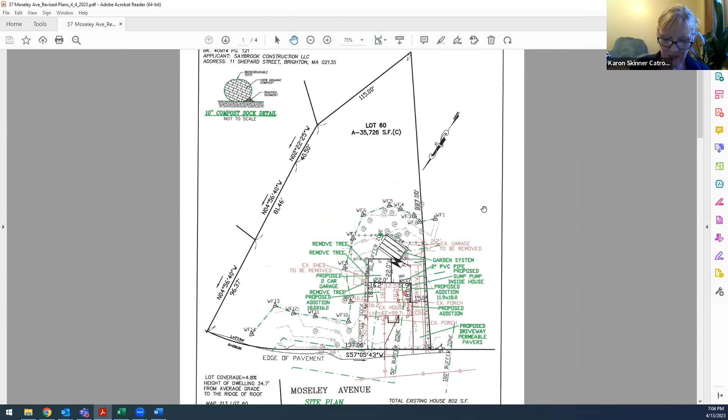What we're proposing to do is add a 22 by 22 garage addition to the rear of the existing house, an 18 by 16.2 addition on the left side of the existing house, an 11.9 by 18 addition on the left side of the driveway—some of which is currently stairs and a porch—and a small addition to the front entranceway.

The existing house created 115 square feet of impervious surface within the 25-foot buffer. The additions will create an additional 225 square feet of impervious within the 25-foot buffer. We originally had an infiltration system, a great deal of which was in the 25-foot buffer. We've changed that to a rain garden, which you can see at the back of the house, and kept it outside the 25-foot buffer. As mitigation, we are removing the shed on the left-hand side and the existing garage in the rear.

So we've added a lot of plantings to the plan. We added 6 trees for the 3 that we're taking down, and we've added 12 shrubs and 15 pollinator plants, mostly along the left side of the 25-foot buffer and in the area of the shed, which will be removed.

Also, there's a sump pump shown, which will be collected in the rain garden. So I don't know if that makes it a little bit clearer for everyone.

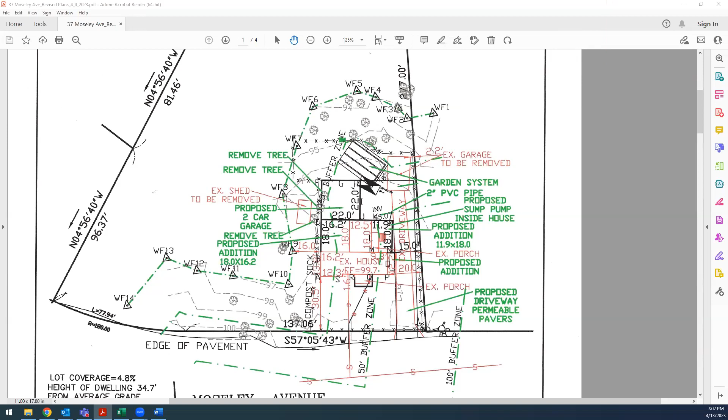I don't believe so. Daniel, is there an infiltration system? That's erroneous - there won't be any storm tech systems on the site. It'll just be the garden system for all the roof discharge. So this note 3 is incorrect. That's right, Janet.

And then this garden system has pipes to drain it through - is that what he's showing here? So there's a pipe shown coming out from under the driveway, going to the house. It's from the front rear of the system, comes out diagonally and then goes into the house.

Then under the notes, it has 115 square feet of existing house footprint inside the 25-foot buffer, 63 square feet of the existing garage inside the 25-foot buffer, 340 square feet of proposed house inside the 25-foot buffer, and 484 square feet of proposed garage, but it looks like the garage is also inside the 25-foot buffer.

Is that just a portion? Is that part of the 340 square feet? Yes, just a portion of the garage is part of that calculation. Okay, that helped clear some things up.

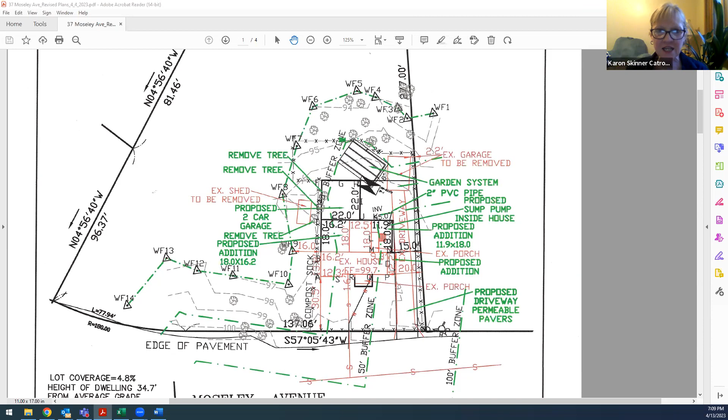Okay, so I'm going to go around and ask commission - Allison, any comments at this stage? Is there anywhere the new trees are shown? I can't see them on this plan - unless I'm crazy. No, you're not crazy, there's another plan, a landscape plan. But it's not up now though, right? Yeah, it's coming next.

Keep going, one more, there you go. So I did go out to the site and look and find locations suitable for a tree, so they're not just randomly put on the plan. And then we tried to focus the plantings on pollinator plants.

Proposed addition, remove tree, remove tree, remove tree, garden system - where's the proposed trees? Expand a bit, move down a little bit. It's on the top of the sheet, other direction. There you go. Oh I see - B, N, B, M, N, B, N, B, N, B. Okay, I get it.

So actually, the proposed trees are in the front of the lot - if you scan up a little bit, Clay. Yeah, they're on the left of the house in the front. That's the area they had the most room for trees. So RM is, I'm assuming, red maple? Red maple, yeah.

Okay, and you have sugar maple, red maples, and a box elder. Elder - that's on the list, huh? Yeah, wouldn't have realized box elder was on the list.

Okay, and then there's some perennials. We have some garden plants, winterberry, milkweed. So where are the garden plants shown? They don't have those symbols.

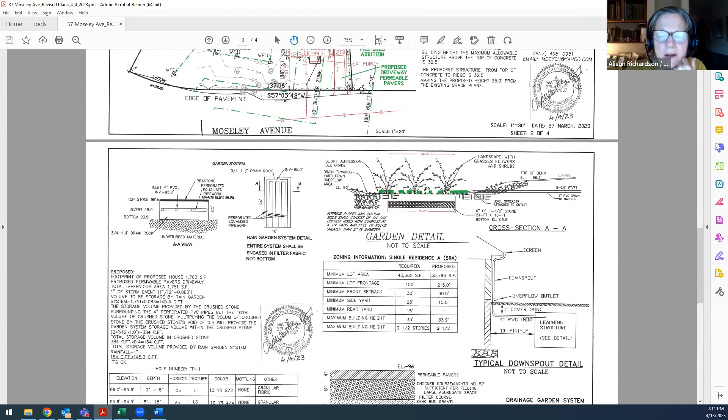So those are shown with initials there - the garden plants are proposed in the rain garden. Okay, okay, in the garden. Okay.

I guess the only oddity to me is the box elder. I'm not sure, is that on our list? Where did I put it? Debbie, I believe I used your list. It must be, but I've never - I'll get back to you on that.

Would you prefer something else? No, it's okay, if it's on the list you can use it. It's not a great plant, but that's okay.

Do you want us to change it, put a silver maple in? We could probably put a silver maple in there - it's a much bigger tree, so we'll change that. The other thing is it's Acer rubrum, not rubrun.

And it's saccharum - there's some spelling mistakes, just want you to check your spelling. Probably my handwriting when it was transferred. Yeah, probably. So you'd like a sugar maple, that's fine?

No, I don't want a sugar maple - they won't do well there. But you could do a red maple? Or you could do something like an amelanchier, a shad.

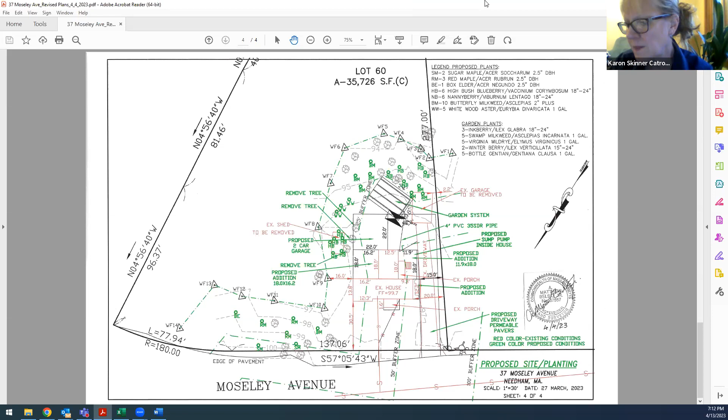Okay, you could do that. That doesn't get too big. It's nicer looking than a box elder. Box elder looks like a weed.

I know if it's on the plant list, it's on the plant list. It is native, but I don't know. A shad is nicer.

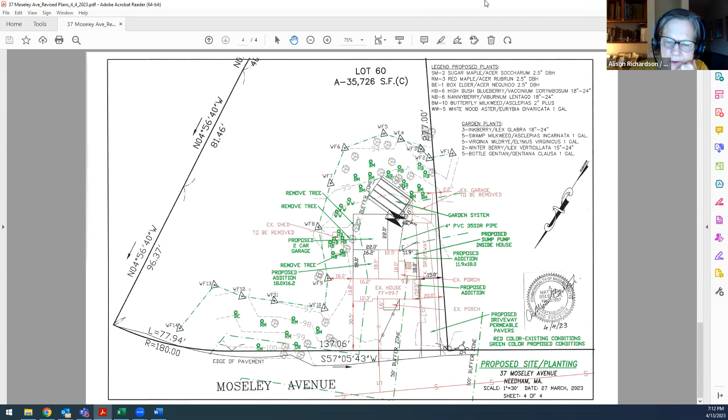Okay, the only other question I had was just in general, I realized that part of the house is within the 25, but they're actually building new parts of the house in the 25. And I just want the commission to tell me that that's okay.

Yeah, no, I don't know that the commission needs to tell you that that's okay. We don't usually approve any new building in the 25. Even if there's an assumption that because there's an existing structure they can build, they can replicate within the 25 since an existing building was there, right? Yeah, it's our call. We get to decide.

That's a discussion that I think Janet and everybody, Dave and Selena, would entertain. Okay, all right, that's it for me. I was counting on Steven for bringing that one up.

Steve, do you have any comments? Sorry, just unmuting. Yeah, that's a good point, Allison. Personally, I guess I'm okay. It's a small lot and there was a building there.

I really don't have an issue with what they proposed here, personally, with the additional 225 square feet of additional building inside the 25 foot. You can keep thinking about it.

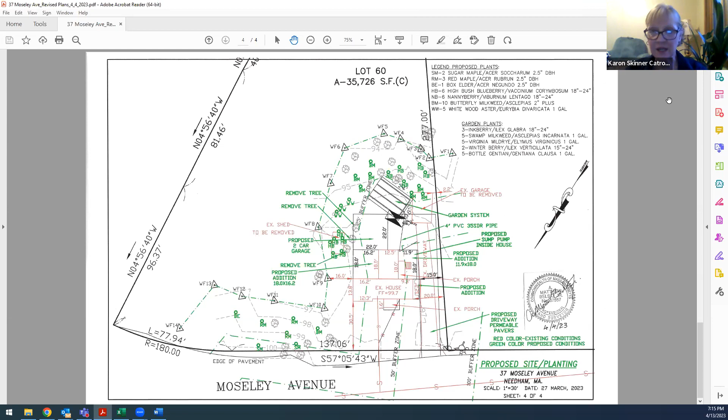So the engineer has provided calculations. That's not really my forte, but where are the calculations? I believe the calculations would be on this page. I can't read that because it's too small.

Well, there were previous calculations for like an infiltration basin. That information is still on the drawing on the left under proposed. But my understanding now is that it's not going to be constructed, rather a rain garden. Were these calculations run for the rain garden system as well? Yeah, these calculations that you see presented there were run for the garden system.

The only wrong note is on the first page under number 3, as noted, with the StormTech system being there. All the other calculations are accurately done in terms of the runoff as well as the storage volume.

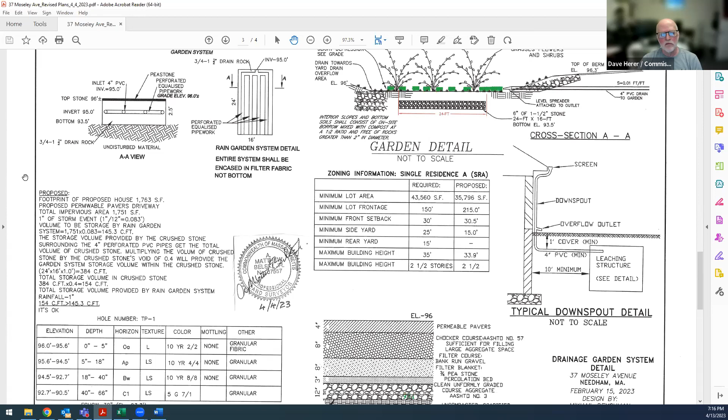So my final question is, what happens to runoff from the driveway? The driveway is going to be done with pervious paver, so there shouldn't be any runoff. They're gonna be 100% pervious? Yes. Okay.

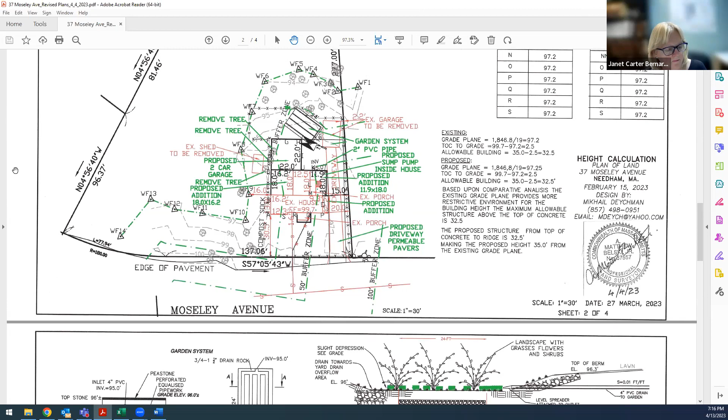So the rain garden... sorry, Dave, are you done? I'm still looking at these calculations.

So 1 inch of storm, and then the storage volume provided by the crushed stone surrounding the 4-inch perforated PVC pipes. So there's pipes under the garden, and then there's plants. I've just never seen a rain garden like this, with perforated equalizing pipework. It's a different design that I'm not familiar with, so I would like to be more familiar with it.

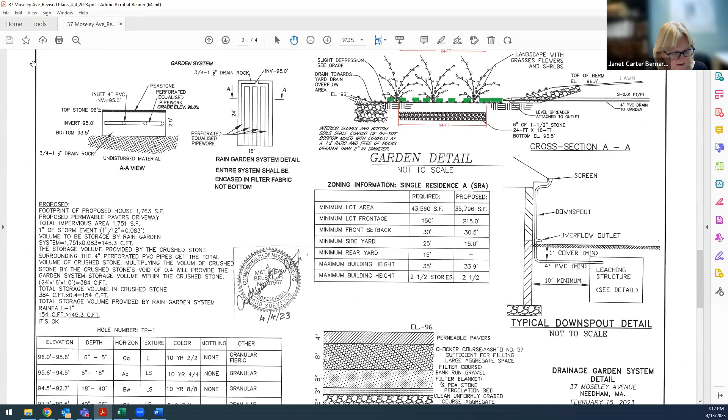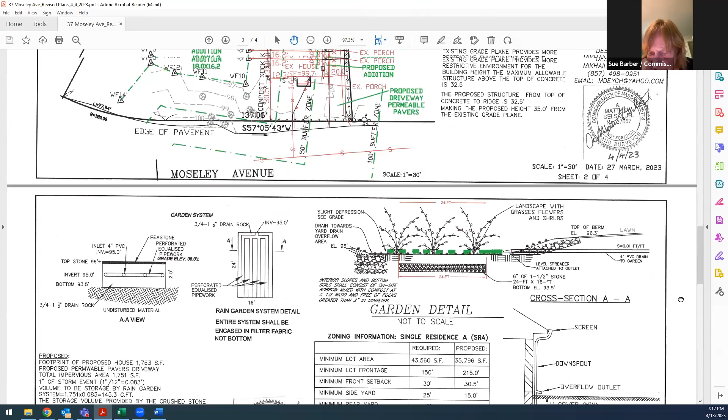Sue? Where are you? Yes. Yes, I thought we established at the last meeting with 37 Moseley that there shouldn't be any new construction within the 25-foot buffer. As long as I've been with the commission, it's been a very consistent, strict regulation. I thought we were establishing it at the last meeting. I heard that we were concerned about the proposed work within the 25-foot no-disturb zone.

So we can further that discussion. You've anything else? Is this for me at the moment? Yeah, no, I'm concerned about that. That's what you're concerned about? Only because we're not being consistent if we allow something like that.

Paulina? I think also the existing shed to be removed, we kind of decided wasn't really a shed. It was kind of just a piece of wood that had fallen. It looked more like a boat raft, sort of, but maybe it was a shed at one time. I had the same concern as Sue - you don't want to set a precedent if we've never allowed anything being built within the 25-foot buffer zone.

Yeah, that's kind of my big concern. I think it's very unusual for us to approve something that is within a new building construction. We have maybe allowed patios inside previous lawn areas, but houses with foundations, I believe this is a full foundation that is being proposed. Is that true? That is, yes. So like this 18 by 16.2, I guess I have concern on that amount of impervious area and that building so close to the wetland. But I am willing to hear what our other commissioners have to say about that.

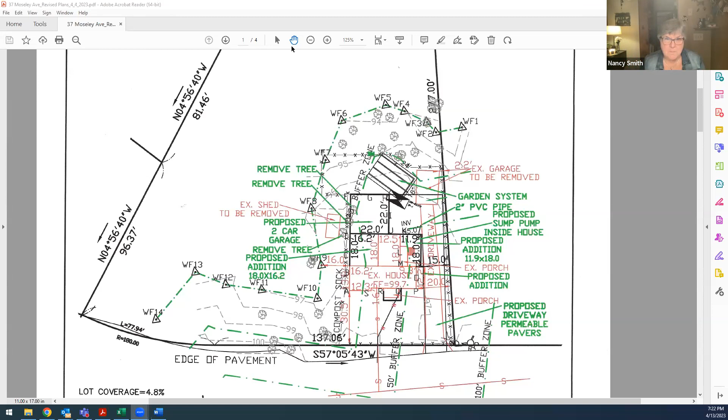I will start at the top of my list. If maybe we could go back to that drawing. There is a marking on the plan. Miss Catroni had mentioned in the letter dated April 6th that there were 4 additions to the house. And there is something that I can't quite figure out what it is. It's to the right of the house, written in green, and it says proposed addition. The line goes to, it looks like it says 12.2. Bottom right, it's actually written in what would be my property.

It says, yes, exactly that one. And I don't know what that is. It's not the front porch. It's not the side porch. It's not the addition, it's not the garage. I don't know what that is. It's interesting you bring that up because I thought that proposed addition was supposed to be pointing to the front where it says existing porch. I thought they were making that larger.

Oh, that's correct, Daniel? Wait, is that correct, Dan? So that's just the arrow pointing to the wrong thing. Exactly, it's just the indicator arrow and we need to clearly change that to make it a better indicator. Excellent, I appreciate that.

Can you tell me the dimensions of the new front porch, that small addition? It looks like 1.6 feet. I don't know the other dimension. Nancy, I'll have to get back to you on that. Okay, terrific, I appreciate that.

Okay, there, oh, Karen is not on the call anymore. In reading through a lot of things, I was concerned about vernal pools kept coming up in my wonderings. And I'm wondering if there are any vernal pools anywhere in the no disturb or buffer zones?

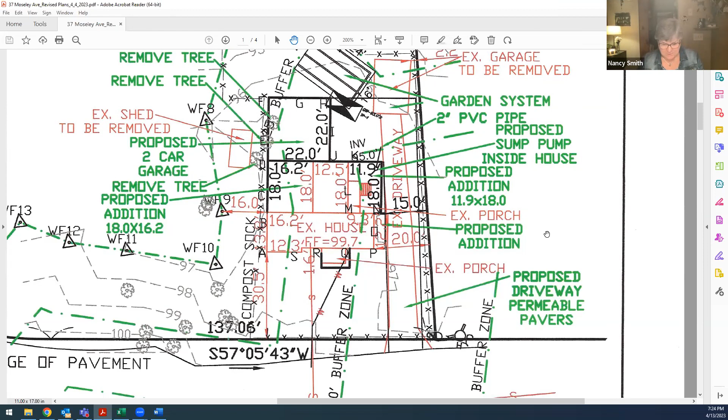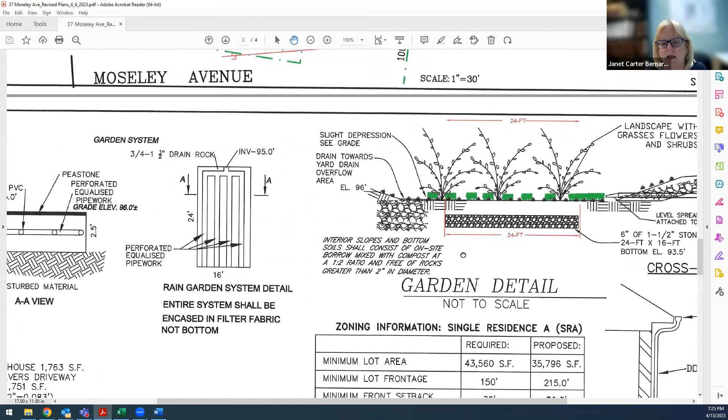I'm curious about the rain garden, the 16 by 24 rain garden, and how it's different from the StormTech system, which was termed infiltration. So the StormTech system was something that was going to be under the ground, basically a chamber system, and maybe somebody would put a driveway or grass over it.

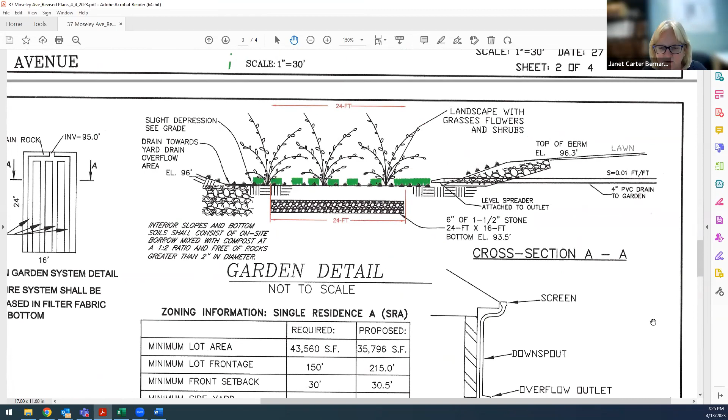Because groundwater is very high, they couldn't fit something underneath there. The rain garden, even though some of the stones, soil, and pipes are under the ground, there will be plants like a garden over it. The water runs through the pipes, the roof runoff, which is considered clean, and that feeds the garden. It should be a very lush, happy garden, that's the idea.

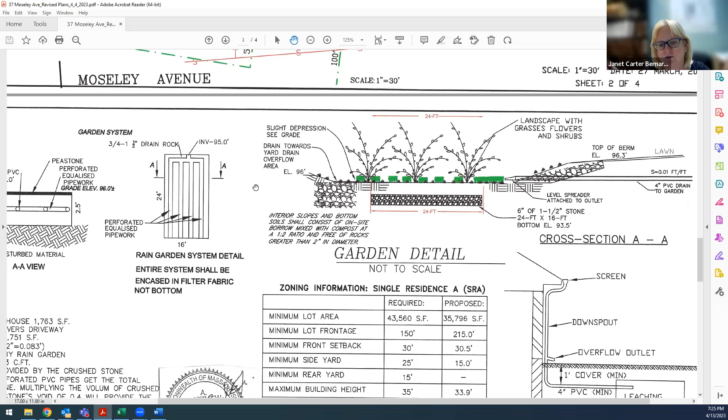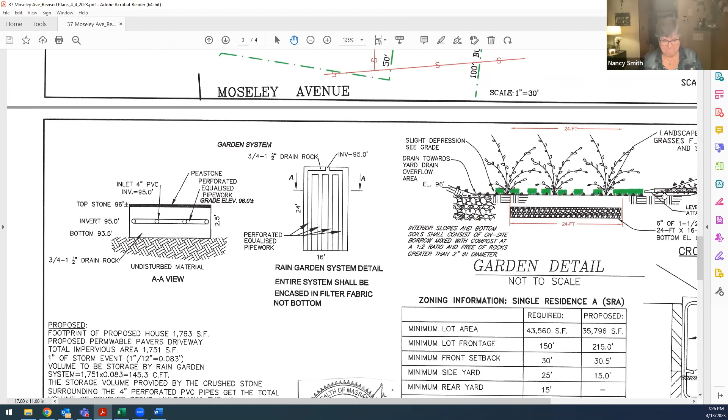Is that 2.5 feet above ground? No, it's not 2.5 feet above ground, it's depressed. The 2.5 feet should be below the ground. The pea stone is the top surface, and there's a garden detail where the little green squares are - that's the surface, that's the ground. The stone and the pipe is below that, that's the underneath part.

Hey Janet, it looks like the size of the rain garden is the same as the infiltration system previously proposed. I don't think the storm tech system was ever proposed. That's correct - there was an infiltration system, the top of which was covered with pea stone. It looks like the change that was made was to put the garden on top of that, presumably to make it nicer.

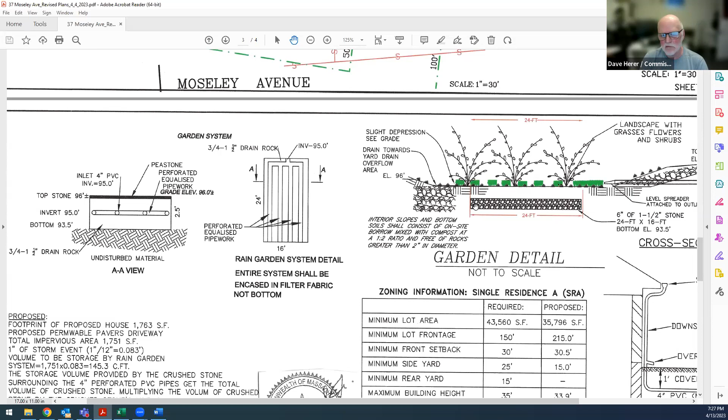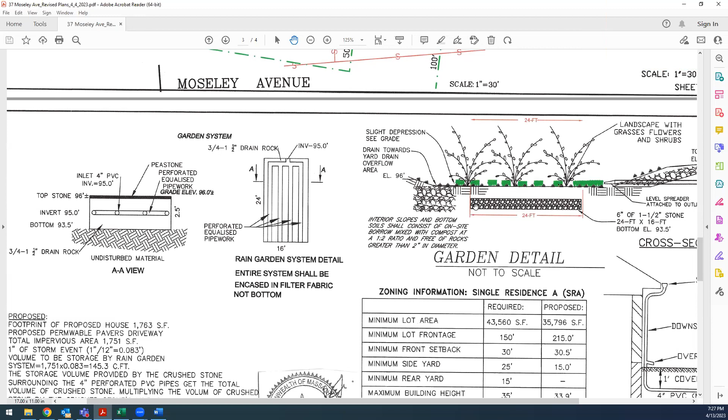All the plans do show a storm tech system. Yeah, but I think we established that was an error, wasn't going to work, incorrect, it just hasn't gotten fixed yet. Good, thank you. Would that rain garden deal with the roof runoff, and will it also deal with what's pumped out of the basement through the sump? Absolutely, they are saying that they're connecting their sump pump to their rain garden.

Okay, terrific. In terms of trees, can I go to trees next? Sure. It appears that one of the two 5-foot diameter trees is in the 25-foot no-disturb zone, which will either be removed according to the plan, or if they leave it, the roots will be significantly negatively impacted by the excavating of the 18 by 16.2 cellar. How can that tree be preserved?

One of the trees they're marking for removal - I believe it's the top one, the 5-foot diameter tree I mentioned at the last meeting. And the one that's in the garage - yeah. They're saying remove it, and at the last meeting we spoke about it not being preserved, etc. I thought it was the one next to the shed, which is also showing being removed, but yes, it could be either one. And as somebody smartly remembered, it's not a shed.

It's barely a standing structure, doesn't have any foundation. I took a bunch of pictures in case you want to see it - there's holes in the roof, you could blow it over. It's not a shed, it's a lean-to at best. So those 3 trees in the 25-foot buffer zone are a concern, but particularly the 5-foot diameter tree, which is in the garage.

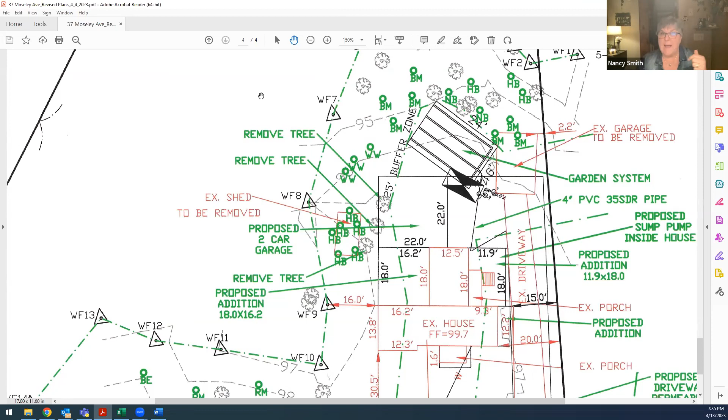When 37 Moseley was built, there was no 25-foot no disturb zone. Over the years, and particularly in recent years, it has become that. So those structures that are there that are currently in an iffy place, the wetlands worked around rather than they were infringed on in a new kind of way. So I think it's relevant because as the wetlands overtook more and more of the property and conformed to the existing structure, I think there's some, and this may be my misunderstanding...

It seems like we're being told there's a quid pro quo: if there is 50 square feet that is today in the 25-foot no disturb zone, then 50 feet of new building in the no disturb zone, it's a wash. So I don't know. I think to say that parts of the house and garage currently in the 25-foot no disturb zone are equal to new construction in the 25-foot no disturb zone on this particular property is a false equivalency. You can't subtract what's there now and say we're only adding this much. So I just find it to be misleading and untrue.

That's certainly not our intention. Yeah, I mean, I think they're showing what's existing and then what's proposed. And they definitely are showing that they're increasing the square footage within the 25-foot buffer.

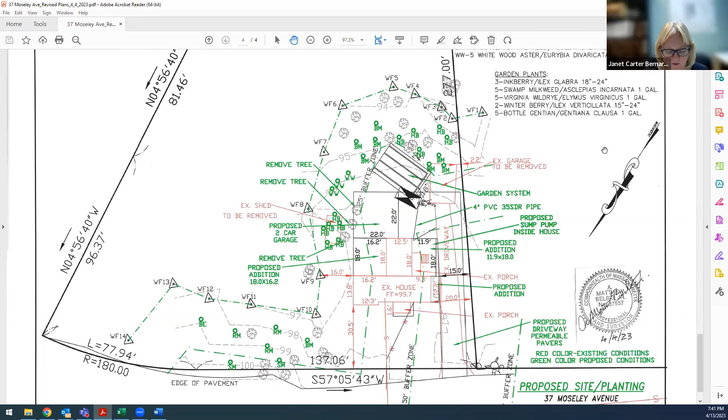Yeah, we appreciate your passion for wetlands. Thank you so much, I appreciate your time. Thank you, thank you. Clay, you said you had somebody else in the audience?

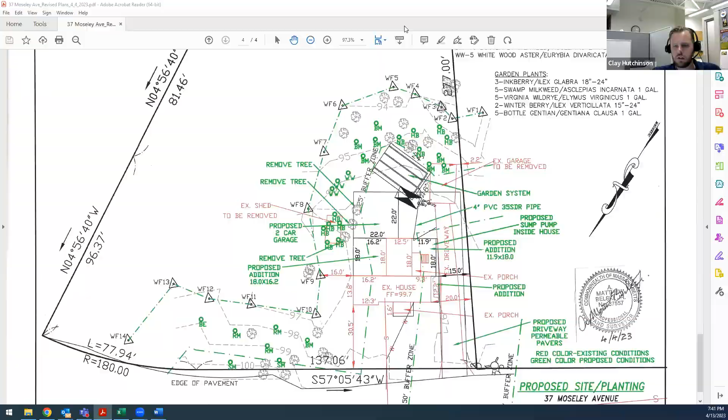Peter Kerr? I see you, you're on mute, and if you want to unmute yourself and state your name and address for the record, you have the floor. Hi, Peter Kerr, 42 Moseley Avenue. I just wanted to add a few things.

I was at the last meeting, and I do remember somebody from the commission had asked about the basement construction in particular and how that would work, considering how high the water table is and what processes they would put in place to handle the water, since they hit water pretty quickly when they were doing their soil test not too far away.

Just a general comment, I think most of the plans and comments I've seen are comparing the current image versus the future image and how much square feet is permeable, non-permeable in the 25-foot area. But there's not a lot of talk about the process. If you're digging a foundation, it's not just, okay, now I have a new size.

You're digging and potentially damaging tree roots, equipment all over nearby, and potential impact to the wetlands through that whole process. So it's not just a matter of looking at here's the end result, here's how it's going to look. It's what are all the different things you have to do? I know you talk about putting the socks around, and that's part of it, but I think there's probably more involved, considering especially that the water table there is very high.

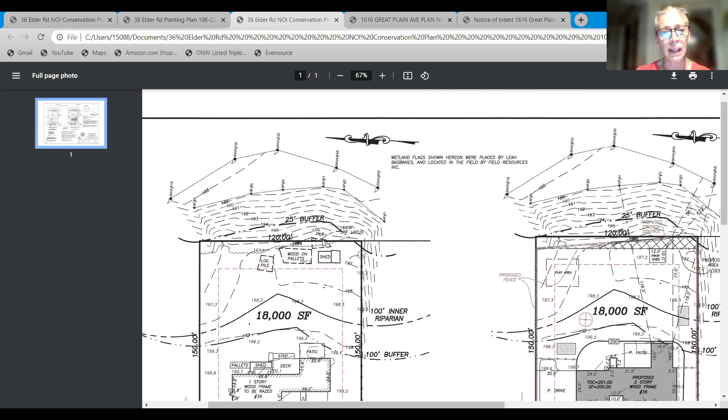So this is the existing house. Currently there's a single family home, decks, a patio, a variety of sheds, pallets, a walkway to the basement, kind of a mishmash of stuff behind the house. Additionally, in the back there's a variety of mishmash, a log pile, some wood, wooden pallets which looked like there was cordwood at one time, which it seems as though the homeowner, as working through this project, has been burning. A shed, and then the side of the shed is kind of like a lean-to that has coverage as well. Additionally, we have the Herd Brook in the back, which has some associated bordering vegetative wetlands that currently their buffers and riparians supersede onto the lot.

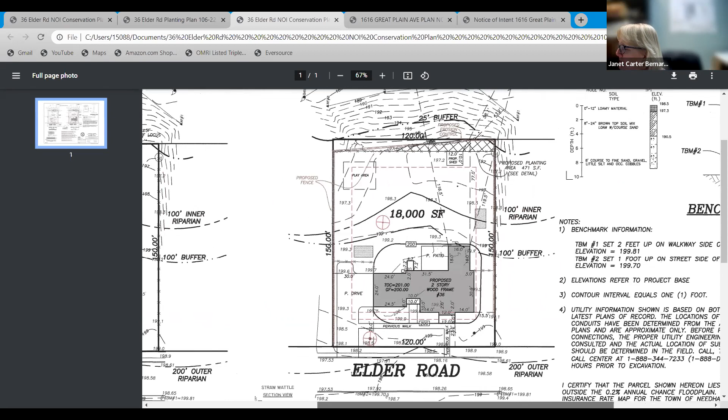We'll move over to proposed conditions, unless anyone has any questions on existing. Nope, keep going. Okay, so we'll move on to the proposed. As you can see, the single family home is relatively in the same spot. We're removing all this mishmash of stuff in the back.

I know typically, some of this in the back is, say, log pile, the relatively large logs, and there are some pictures in the application. I'm not sure if you all looked at that, I can pull that up as well. They're quite large and quite high, so we'd like to remove them because they are hazardous.

We're also proposing to remove the shed and replace that with a shed that's further away from the wetlands. We're proposing the play area in the single family home. In regards to the regulations, we are moving the shed further away from the wetlands and the riverfront. Additionally, the planting plan shows this area here that is hatched to be revegetated, with a fence running along the back of, or in front of, that area.

So for the single family home, the impervious area with the patio and driveway is about 906 square feet more than the existing site. With that, we added 2 trenches for recharge, both of which will include HDXL 150, which will accept the 1-inch storm for the single family home.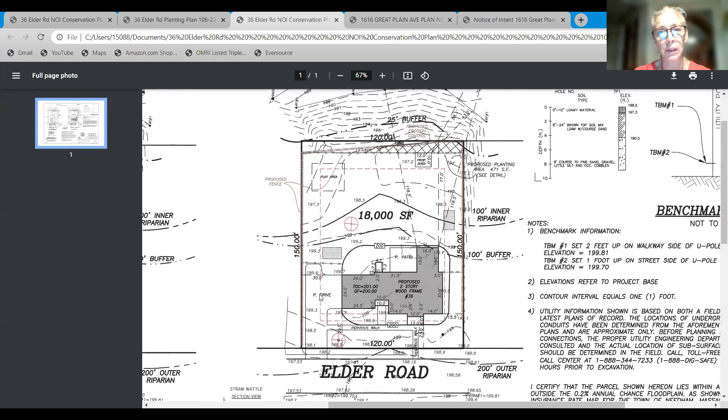Additionally, there are 2 trees coming down, and in the planting plan we follow the Town of Needham's tree removal bylaw, and we're adding trees to mitigate for those. With all this work we're proposing, prior to any work we will put in our erosion control, which is also shown on the plan.

How big is your erosion control? Just because I forgot to print that plan. Yeah, the erosion control is a 12-inch wattle. It's a relatively flat lot - the front of the lot is 198 and the back is 197, so it's really flat. But most of the erosion control for this particular site would be for any dirt or fill removed from the foundation, which eventually will be removed from the lot.

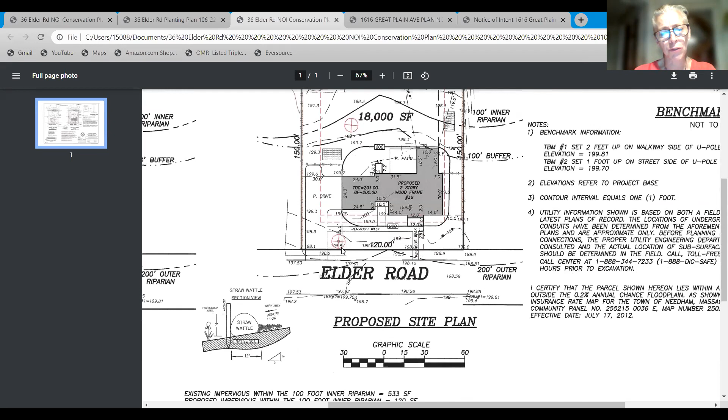What types of trees are coming down? Honestly, I don't know the type, but they're both relatively small. The one in the front I believe is a 12-inch, and the one in the back is slightly smaller. They're not large trees, but this particular one is close to the driveway, and we're not sure as to the survivability with all the work.

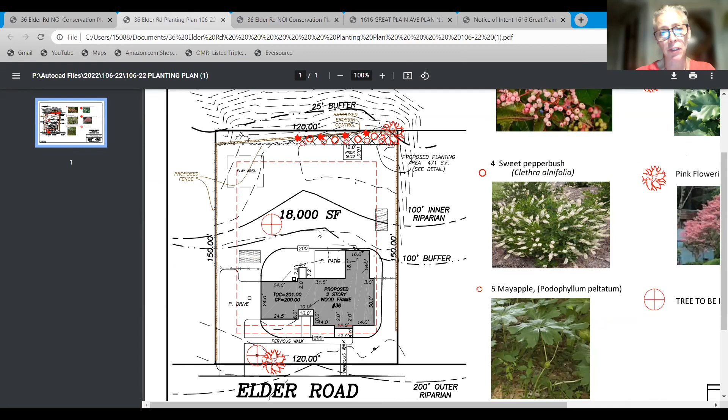And if you look at the planting plan, we do have a plan tree going right back, basically in the same proximity as the removed tree. How big are the proposed trees? Anywhere between 1.5 and 2 inch. We can take a look at that - I'm not sure if you all had the chance to look at the planting plan.

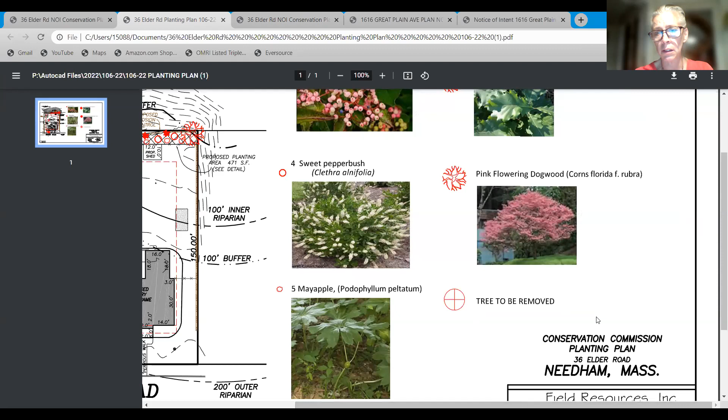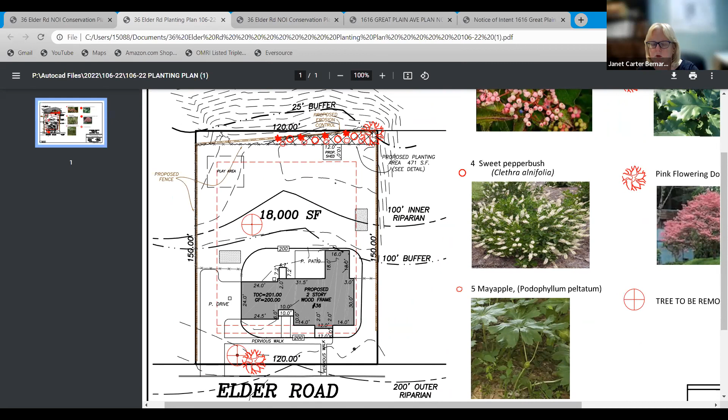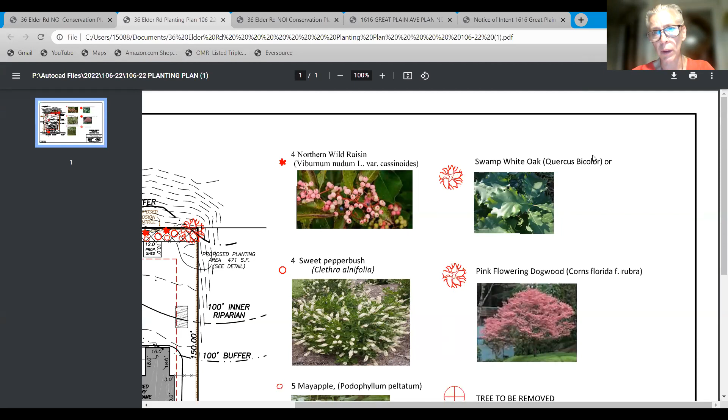So Diane, the symbol for the flowering dogwood and this here - they're the same. So is the dogwood going in the front? Both trees will be dogwoods. But what about the swamp white oak the homeowners mentioned? It was either or, I should say. I believe that's what I had. The symbols were the same, that's why I said 'or' - swamp white oak or dogwood, right?

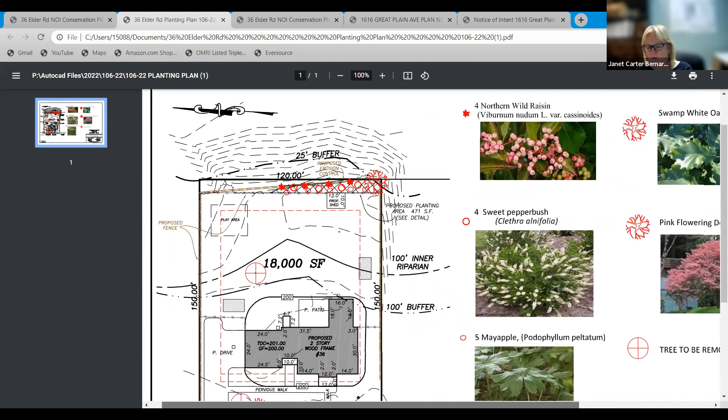But are you planning on putting the swamp white oak in the back and the dogwood in the front, or does it matter? They could be either or. The homeowner said she wanted the flowering dogwood, but didn't specifically say if she was going to put both in or just one. I'm not sure. Yeah, I think she'll want the flowering one in the front and the swamp oak in the back.

All right, I'll let the commission ask some questions. First, Stephen, do you have anything to ask at this stage?

No comments. David - were the site plans submitted? Because I didn't have them in my package. I believe I saw some of the photos. Oh no, I saw the photos in your additional narrative, and I feel like I only had this plan. Were they part of our package? I printed the landscaping plan and the additional narrative, and I'm like, wait, I saw a photo somewhere, but I didn't get the site plans.

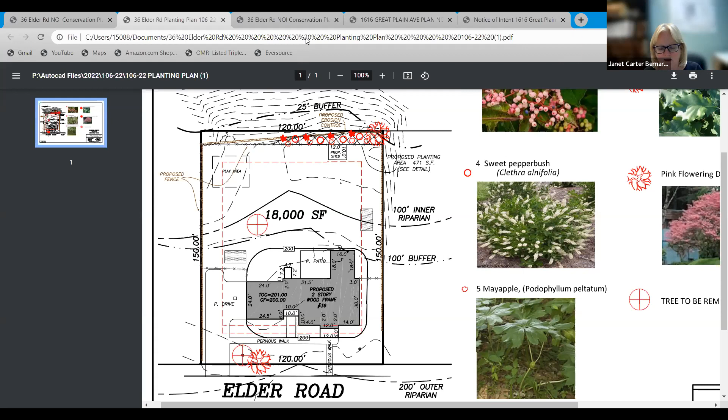So are they in the - I mean, it looks fine. My only question is where were the test pits? Can you tell us where the test pits were done? The test pits, I believe there's one done in the back here. They were actually done exactly where you see those proposed infiltration systems - yeah, that's where we did those test pits, that's why they're there.

Anything else, Dave? No, looks fine. Paulina? No comments. Sue? I'm fine, but I just had a quick question on the side.

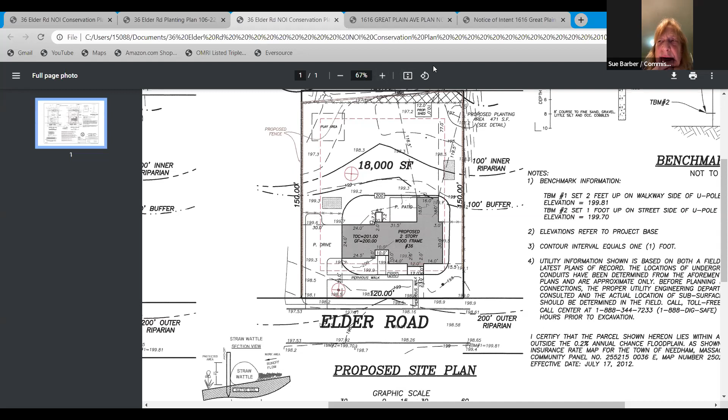When within the 100-foot riverfront area trees are taken down, did we run into something where there wasn't enough mitigation plan? Do you remember that? We did - that was on Dedham Ave. Is there anything similar here? I don't know, that's what Deb - on this one I know DEP asked, I had a lot of comments. Well, Clay has done a lot of work on this, so he has feedback.

This one isn't as robust as 311 Dedham Ave in scope of work and changes. But I attended a workshop on Monday with DEP and our circuit rider for the riverfront standards, and we were pulling information from DEP's comments back for 311 Dedham Ave. DEP did issue comments for this one too, which didn't really elaborate much, but just said the performance standards must be met pursuant to 310 CMR 10.58 5A through H.

Which is the riverfront redevelopment and riverfront. I was going through some of those standards, and I believe Diane today submitted some additional supplemental information on the DEP comments.

The only concern I had was when looking at the numbers. First, I think the log piles and the wooden pallets were included in the impervious areas in the 100-foot inner riparian, and I believe DEP has previously said that doesn't constitute degraded. They have a very narrow scope of what's degraded, and I don't think in this case they would constitute that as impervious and a net benefit. They're relatively small in the scope of work.

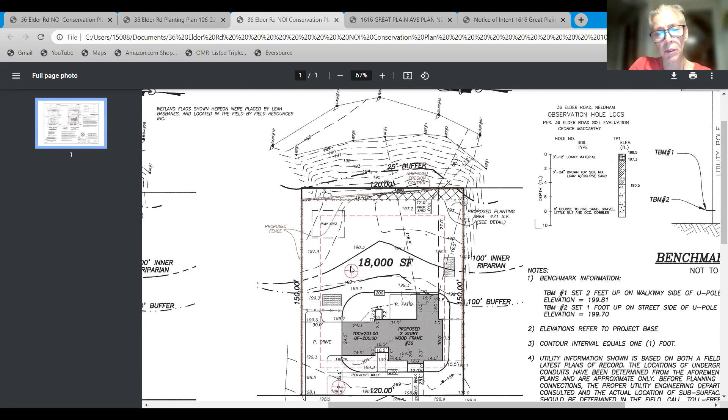But if they've really kind of confirmed that they want less lawn and have that turned into the mitigation areas - so we do show the edge of lawn here. Well, Clay has pictures if that edge helps. So we definitely do not want to have DEP come back to us and try to supersede one of our orders again.

I don't know, Diane, if it makes sense for you to have an off camera conversation with Clay to make sure that the numbers are meeting what he just went through, to make sure it makes sense for what DEP wants. Yeah, I would like them not to supersede us again, not to appeal one of our orders.

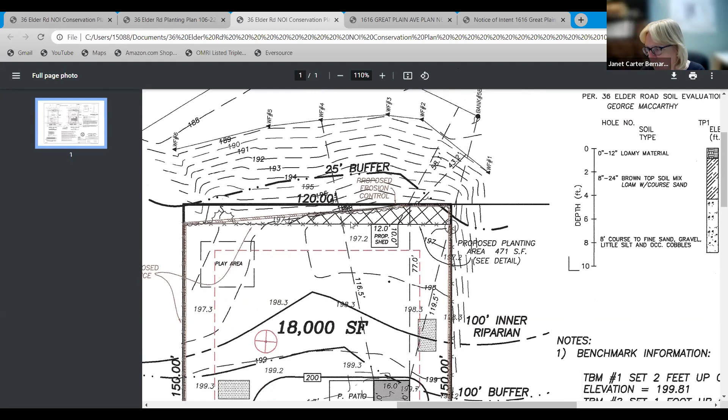No, I think the general design with the house and the chambers seems reasonable. I would like to see the size and the type of trees that are being removed. But you want to see any pictures? I did take pictures of the trees and such. Sure, if you have them ready.

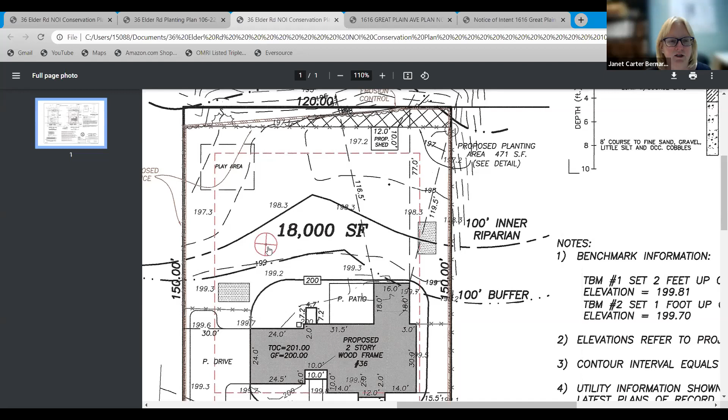Okay, that's the one in the back. Is that the one being removed in the back? Yeah. So that's kind of the area issues. So that's the shed. So that's behind the shed where you were going to plant.

I don't know if it's necessarily lawn. No, that was the edge - we had an edge of woods layer, so from tree to tree is what we did, edge of woods. It's kind of hard to say where the lawn actually starts because it's mossy and there's some leaf litter. Yeah, they actually had a boat back there at one point. Yeah, they have a couple still behind the house. Yeah, so that's what I'm saying.

And the site has changed. Tripp's family has owned it now, I think, for a little bit, so things are slowly cleaning up in the yard. Things are being removed, but like I said, there was a boat behind there at one point - there's lots of debris piles of various different things. So yeah, that's another log pile, and then there's just kind of random piles of different types of debris back there. That's all the photos.

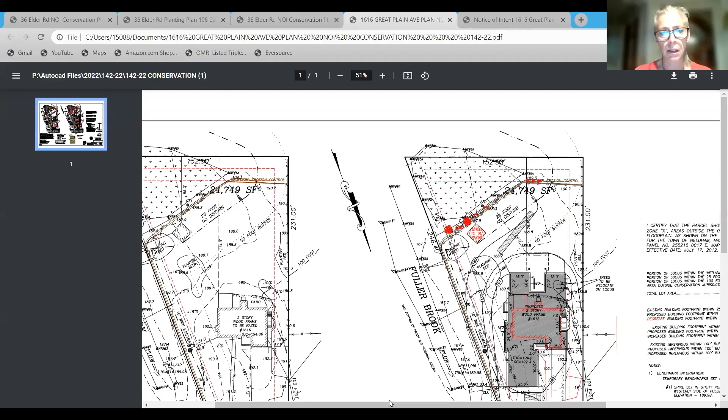Could I share our screen with us? Yes, you may. Okay, so here we have existing conditions. This again is, Janet, as you said, 1616 Great Plain Ave, very familiar to you, but maybe not so much for others. We have a portion of Fuller Brook here, which is an intermittent portion of Fuller Brook, which also, the lot has some bordering vegetated wetlands, which is associated, even though you had an application recently that says it was not associated, but it is connected with some pipes to Fuller Brook.

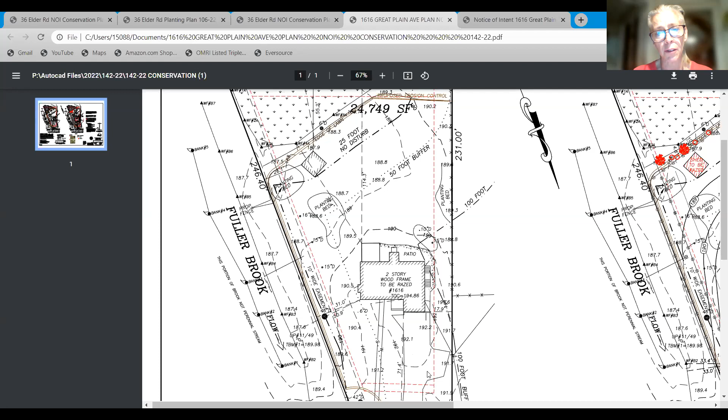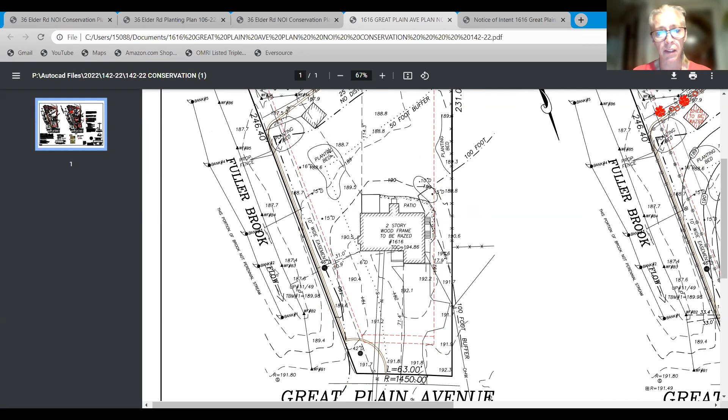Within this wetland area, there are two pipes that actually connect. There's currently a single family home behind this lot, and this area to the east side is a paved driveway. I just want to bring that to your attention. It's not shown on the plan because it's not a part of the property, but it is a paved driveway on the east side of the property. Currently, there are some planting beds, existing lawn, a single family home, and a rather large driveway, all within the buffer to the wetlands in the back and to the wetlands from the intermittent portion of Fuller Brook, which again is on the west side of the property.

Now we'll move on to the proposed... so there's the house, the pipes, but the pipes are not shown on this plan. Is that what you're telling us? We do have them located. I don't have them specifically drawn out in the plan here, but they do exist.

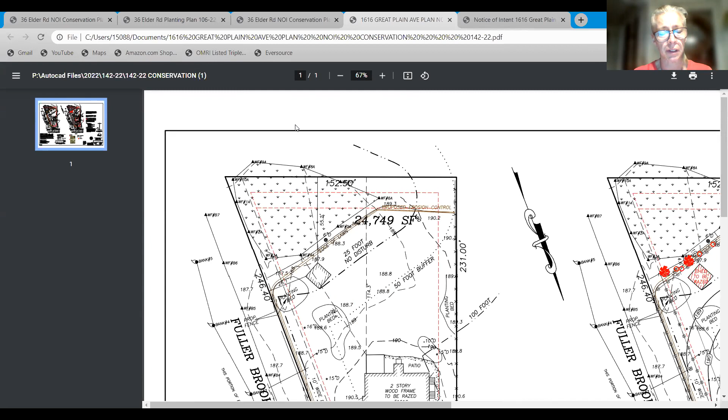I mention it only because the application in the back that I looked through, to make sure we're all on the same page, says it wasn't connected, but it is connected. There are pipes there, two of them. I don't know what kind of pipes, honestly, but they're like 6 or 8 inch pipes that go under the driveway to the wetland area. And we can put that on the plan if it's something you'd like to see on the plan.

And here we have the proposed single-family home. The current home is shown in red, which has a rather large patio that comes around and goes to the back side of the single-family home. Again, we have the driveway coming in with a side entry garage. And we have the infiltration, and we have some plantings.

The edge of lawn is currently just in front, just behind the shed to be removed, which also has a fence, a little snow fence that looked like it was yard debris at one point, which we will remove along with the shed. That's why we have plantings back here to fill in the area that's currently void of any plantings. Currently there's a variety of invasives back there, which we will clean up on our property. It does extend to the property in the back.

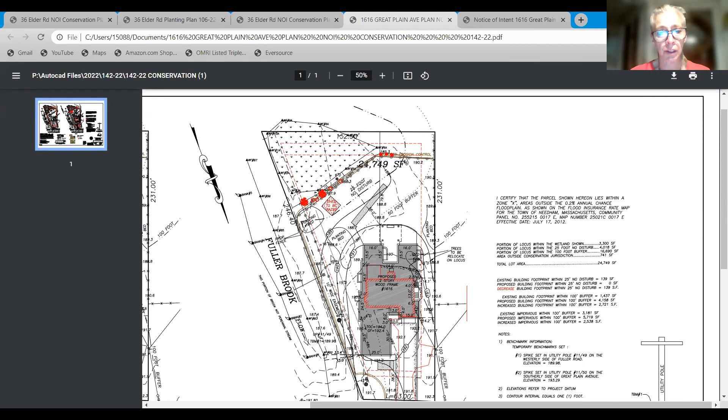But the existing lawn does go right up to basically where we show the proposed erosion control. We do mitigate for recharge from the single family home. We are protecting all the trees on the east side of the property. Currently there are two trees in the back right behind the single family home that's currently there. We are going to transplant them to the back, over by where the existing shed is, so we can preserve those. In addition, we have some proposed plantings to be added.

Is this a different plan than we had? It looks different than the one I'm holding. I don't think so. Well, we had a few revised plans for this, because the infiltration system is turned differently. So this is the most updated one.

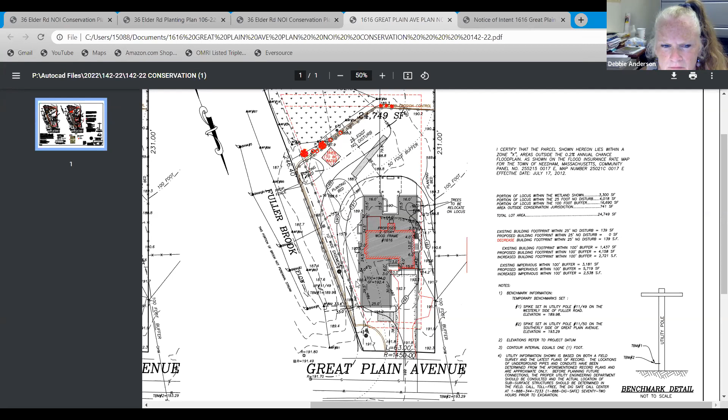I'm just thinking that this may not be the one. The one I have says revised April 3rd. Yeah, this is not a revision.

So I guess one of my questions is, how reasonable is it that those trees to be relocated will actually survive? How big are they? They're multi-stem, so they're not one 15-inch DBH tree, they're counting the different stems on it. So does that mean it's reasonable to relocate? I think they probably are.

Yeah, and if we show pictures later, I can point them out. It also depends on when they're going to dig it. You can't dig it when it's in leaf.

We'd like to do it soon. We could do it tomorrow if that's something you can give permission for. Can you maybe put up those pictures, Clay? It might help with the discussion. And then that way we could get them situated so we have a better success rate.

Those are the two trees. Are they Kousa dogwoods? They might be. They're gonna have a really big ball on them, like an 8-foot or 7-foot ball, on the first one anyways, which looks bigger than the other one.

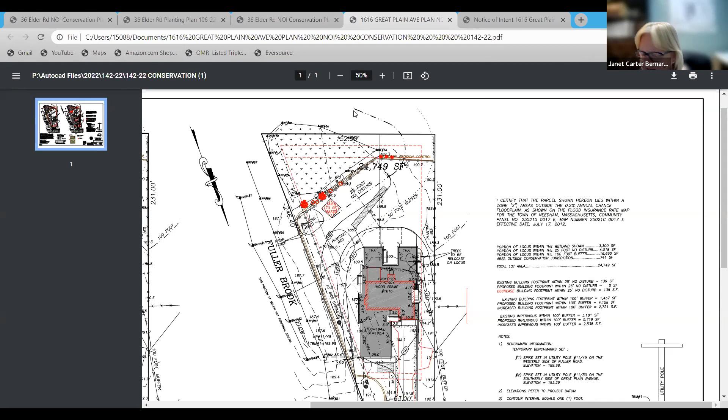Sure. Okay, so yeah, we did revegetate. What were all those lines too? There's a whole bunch of lines I was confused with. They were lines meaning, yeah, it's a function of erosion control, the fence, edge of lawn, it all kind of falls in the same area. So yeah, it tends to be a little confusing unless we blow it up a little bit more for you.

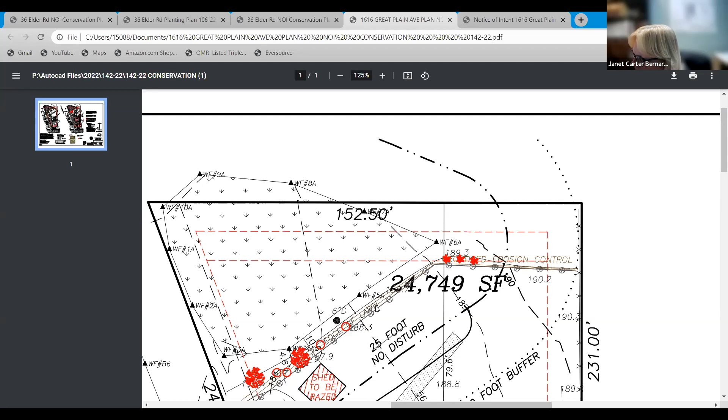So we have the edge of lawn, we have a proposed fence, and erosion control - so there's a variety of things there. We are revegetating, I believe it's almost 500 square feet of additional lawn area. We could do a little bit more, I'm sure.

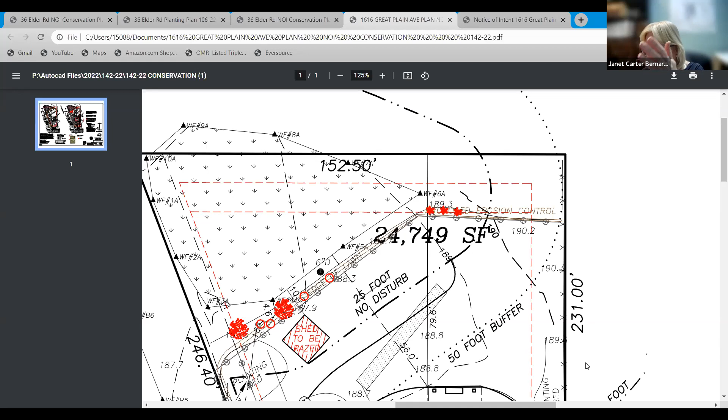If we, is that something? Well, I think I feel a little bit better about it now. And the planting bed that is also, where are we, to the left of the house in the backyard - I assume 100% that the property owners understand that that is going to be changed completely, if there's plants there that they're expecting to survive, because you're regrading the whole thing. So I just want to make sure they're aware.

As soon as you move that 189 contour back and you bring it, I mean you're filling it a foot, so. Yeah, we have to do that because of the water table.

Unfortunately, that was it. So the planting bed, if there's plants in that planting bed that you're hoping are - because it's the same exact shape, I just want to make sure that they are 100% aware that anything in that planting bed, they're going to want to dig up and replant or whatever. That doesn't really concern us, I just want to make sure they understand that so they're not surprised when all of a sudden they're like, what happened to all our flowers?

And they got buried. And the planting bed in the back stays? Yeah, I believe that is staying. But the shed - is that just the forsythia? Yes, and I can never say it. But the shed is going away. Shed is going away, okay.

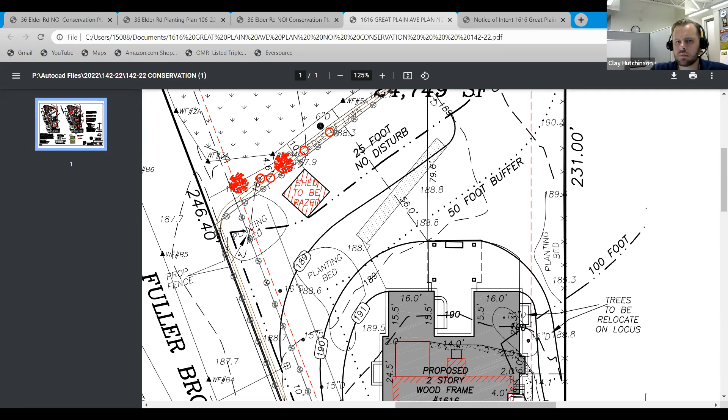My name's Frank Breyer, I'm at 1622 Great Plain Avenue. I'm the immediate abutter on the opposite side of Fuller Brook. I'm not sure this is the right forum, but I just wanted to make sure everyone is aware that the way the groundwater flows in this neighborhood, it flows from Wellesley down through my yard and then into this yard and then ultimately wherever it goes, just by the grade. And I know they're raising their land a little bit, and initially I was quite concerned that it would kind of dam the water into my yard.

After speaking with the developer, I feel very relieved, and I actually feel like what he's doing will help everybody in the long run by what he's doing to mitigate. I just wanted to go on the record thanking the owners and the developer and whoever else is involved for having such a thoughtful plan about the water mitigation from everybody's yard in the process.

Well, thank you. We don't usually get those comments here, so we appreciate that. I have no complaints. I actually really like the plan they put together, and I'm glad they're trying to save the trees, but the best they can do is all they can do. Thank you very much.

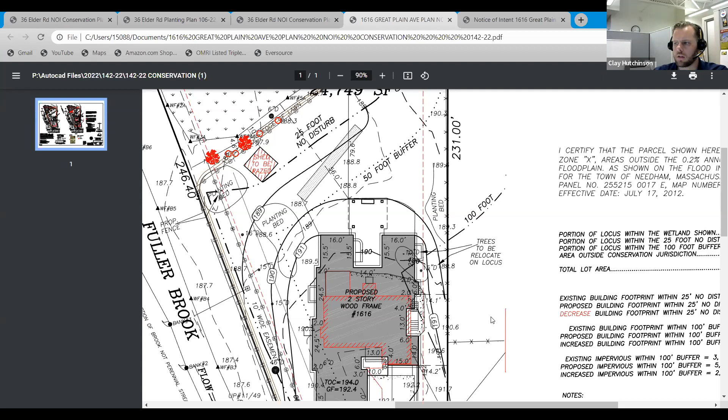That really was great. So anybody else in the audience? There are no other hands. Anybody in the commission have anything more to add?

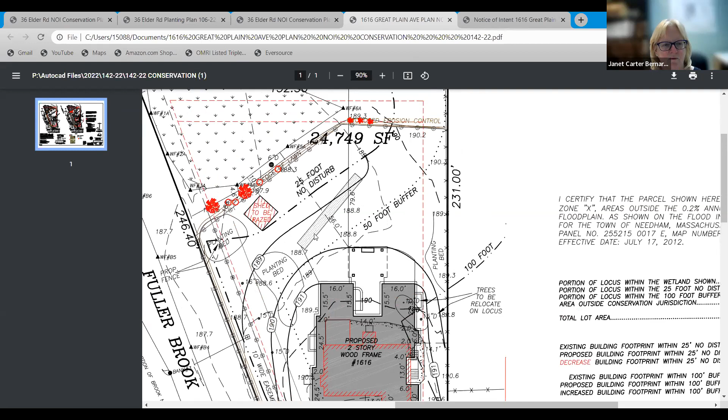So I have not drafted the order, so if you want to close, you can, and I'll have it for the next meeting. About the trees, do you think this is something we can do with an administrative order to have them relocate the trees, so they don't have to wait for 2 weeks when we sign all of that stuff?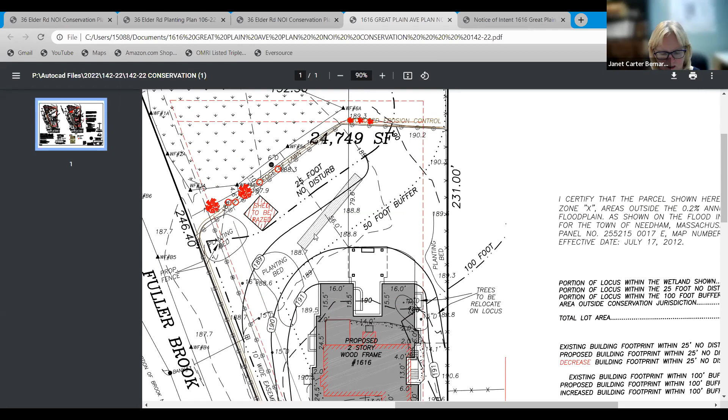I think the request of the commission is to add another 5 feet, bringing the mitigation in from the wetlands, so we have another 5 feet of not lawn. So do you want to clarify - right now the plantings are behind the proposed fence. Are you asking them to pull the fence forward and give more room in the back? I don't really have a personal objection to where the fence lands, it's where the plants are. So if they want to shift the fence and the plants, great. If you want to leave the fence and move the plants, that's your call.

That's okay, that's something we'll update the plan and get to you, Deb. We'll have that discussion. But if nobody has anything else to add on that, we can close the hearing, and the administrative approval will give us the opportunity to do that within the week or so. You can move the trees before we have the order - I'll draft it tomorrow and email it to you and the applicant. Okay, thank you. And then in 2 weeks, we'll be able to finalize the order of conditions.